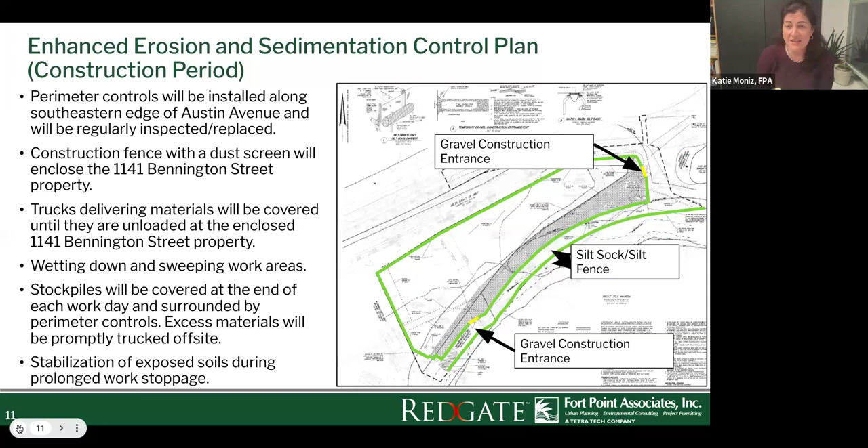Right, so is that on property owned by 1141, or is it property shared by DCR, being the abutter on one side and 1141 on the other? Could I ask staff to go back to a site plan so I can narrate the ownership? It is a little complicated in this space. Perhaps if you could take us back to the waterfront area plan, might be easier to see in color. Thank you so much.

As you can see here, it doesn't show all the way up to Bennington Street, but the portion of Austin Avenue that comes from Bennington Street to the hexagon on this plan is approximately the limit of the private way of Austin Avenue. Again, half of which is underlined by land owned by 1141 Bennington and half underlined by DCR. It has an easement that allows both parties, as well as MBTA fundamentally, to have access.

As we come further down here into the area showing the driveway to MBTA, the majority of that portion of Austin Avenue is purely MBTA's property.

Yes, so my concern is I understand all that. And then we have this gravel filter strip, which will take the first flush. It may require, as you mentioned, quarterly review. Is that filter strip on the inside of where this proposed fence is going?

Yes, it would be on the inside of where the proposed fence would go. As you look at the S-curve shape we have here, it is a linear band following along the edge of the roadway.

Okay, and then I guess my question is, for the part owned by the MBTA, or the MBTA's driveway, will they make the commitment to keep this gravel filter strip clean, excavating and cleaning it out biannually or whenever needed? Or is that going to be undertaken by the applicant at 1141?

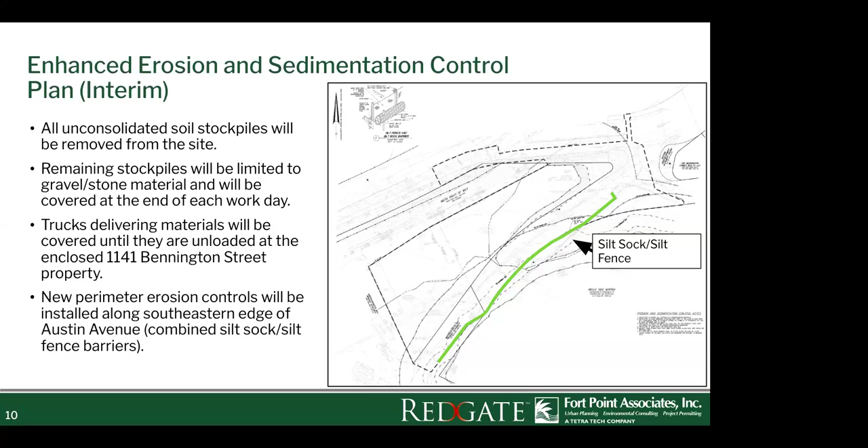And where are the utilities for this building located? Sure, perhaps the staff could go back. Maybe one slide would help here to see if we can see the space between the two buildings. Even one more, if you wouldn't mind.

So you can see here, the hexagon is the driveway into the project site. It is basically the space between the two wings of this building. And just off the page, unfortunately, is the location of the transformers, which are also elevated per the city's policy for climate resiliency.

And how high are they elevated? So the flood elevation here is at most 12. The elevation of the transformers and the lowest level of the building would be at 16, so 4 feet above that.

And in thinking about the future, is there any chart or expectation that you've seen that's going to suggest that the 16 is not going to be above water?

I'll take that as sort of a broader policy question. I think we felt like we worked well with the city staff here. Again, the projections that they are using are 2070 1% projections, so we are comfortable that provides the level of assurance that will make this as resilient or more resilient than Boston's upcoming development and current development today.

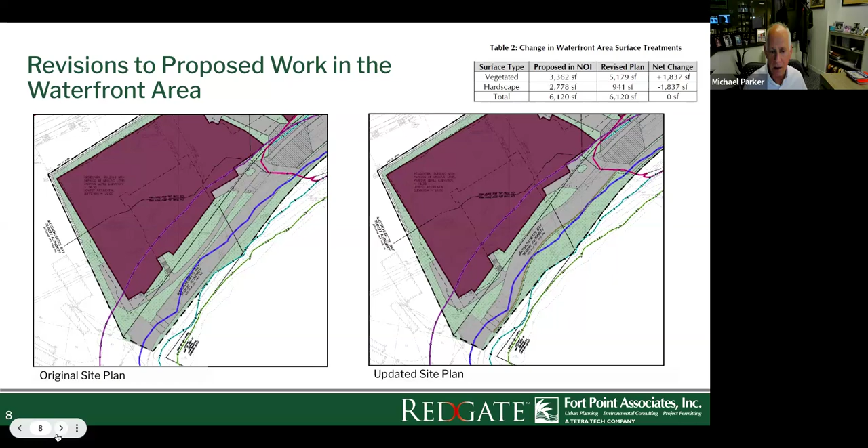Elena, who's up first? I know we have several raised hands. Yes, so I see Cindy Baxter.

Thank you, I really appreciate it. Thank you to the commission. And I'd like to highlight, as you all know, that we did submit written testimony, so we again appreciate the opportunity to do that. We'd like to point out the obvious: this is an environmentally risky spot. It just has a number of items, and it seems like trying to fit an awful lot into a very sensitive area. Not only that, it's a long-term issue in terms of everything going on near this property.

It's not just an area of environmental concern, but we've got the city of Boston trying to manage sustainability because Bennington Street is an evacuation route. We've got the MBTA dealing with expansion plans, not just because of sustainability alone, but because of the commitment they've made to the Red-Blue Connector. And there's, at least in their current design plans, no accommodation at the other end of the blue line. The Orient Heights Rail Yard is basically it. And we've got the DCR, who is actively working on doing marsh restoration within the guidelines and regulations for the Commonwealth. All of this is going on with a number of players who are not present at this hearing today.

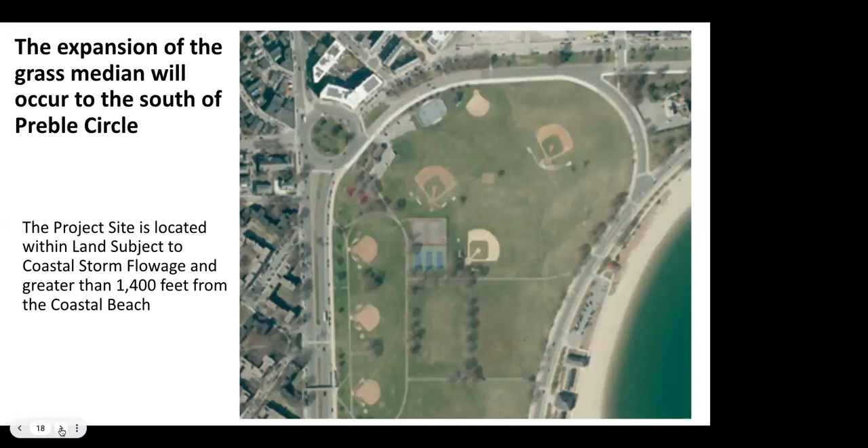So the next slide is basically just an aerial photo of the Preble Circle area, a little closer up so you can get an idea of what it looks like. Preble Circle is in the outer extents of land subject to coastal storm flowage. The floodplain elevation is 10 at that point, and the elevation of Preble Circle varies between 10 and 11. I'll wait for the next slide. All right, so there we are. If we could go to the next one, you can see Preble Circle is about 1,400 feet from the edge of the beach.

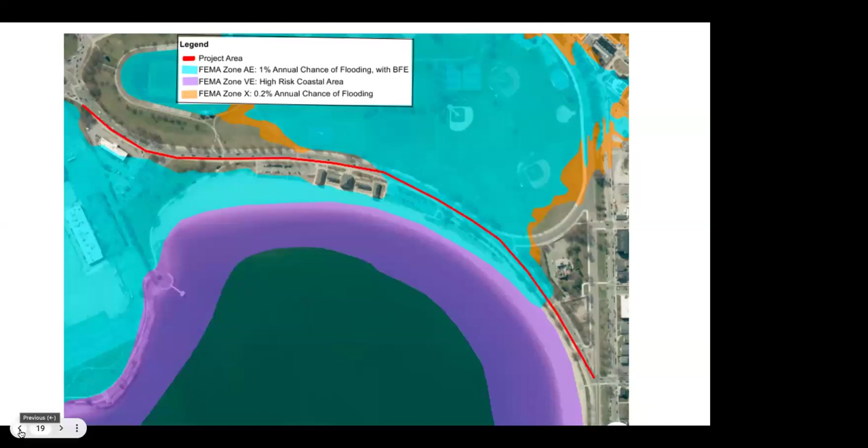Here's the floodplain with the VE zone. None of the work is occurring within the VE zone. That portion of the sidewalk work occurring within the AE zone will be within floodplain elevation 11. We're not proposing any changes to the elevations there. And as I said, at Preble Circle the floodplain changes to elevation 10, which is right about the elevation of Preble Circle itself. So even in the 100-year flood condition, the water would be inches deep in Preble Circle. Next slide, please.

And here we are, and you can see the elevation changes for Preble Circle. It changes real quick from the 100-year floodplain to the 500-year floodplain, which is the orange coloring here. The red line indicates the majority of the work that will be occurring at Preble Circle, and that is now a striped pavement area that will be removed and will become an expansion of the grassy median. So we're going to reduce impervious surfaces within the project area by about 9,400 square feet.

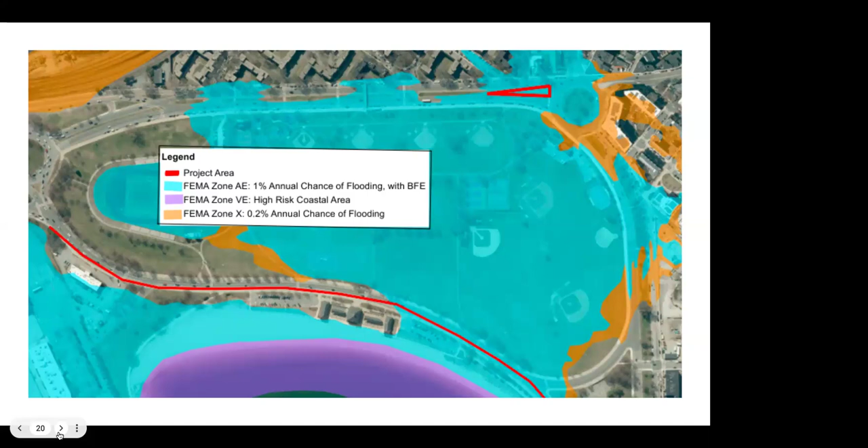So all crosswalks within the sidewalk in the project area will have all the crosswalks be ADA compliant at that point, with no changes in elevation. The temporary, or seasonal, water line that will be installed to service the water fountains will come out of the McCormick bathhouse area there. So we're not going to have to tie into anything in the street. It will just come out of the bathhouse and run under the sidewalk, so we're not going to be in the grass, upsetting root systems or anything like that as we put that in.

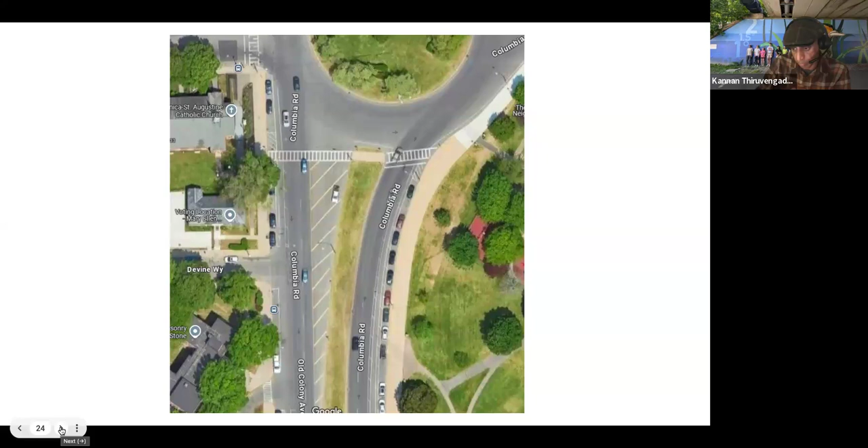Commissioner Kannan asked a final question: seasonal water line means the water line is permanent, but water flows through it only seasonally. Confirmed correct. That concluded the questions.

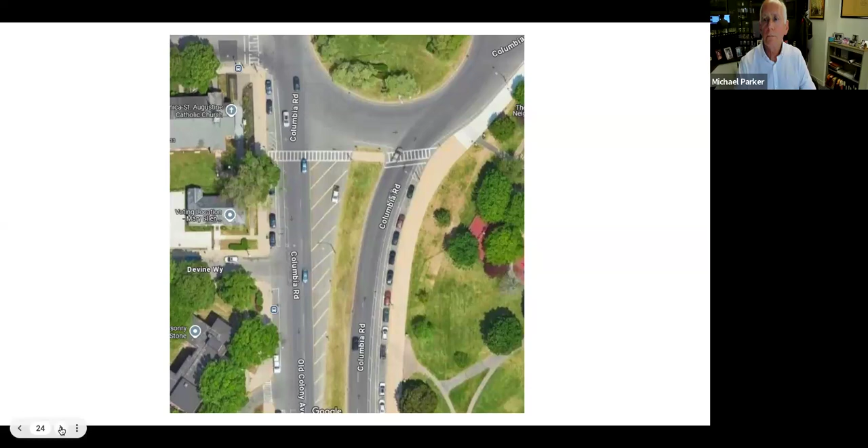Commissioner Richmond had no questions. Commissioner Herbst had no questions. The Chair then asked Elena if anyone from the public wished to speak.

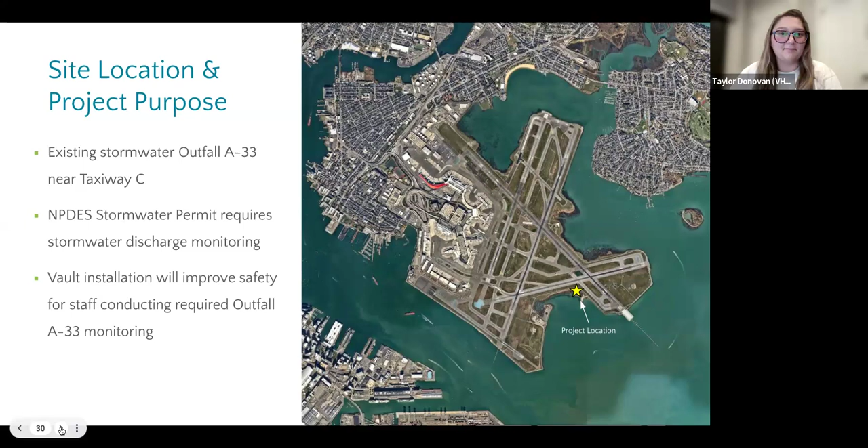Taylor confirmed this is a request for determination of applicability for the project as described. The project is located at Logan Airport near Taxiway C, near existing stormwater outfall A33, shown on the aerial image with a yellow star. The purpose is to improve safety for those conducting stormwater discharge monitoring at that outfall, and the project proposes installing a new stormwater access vault.

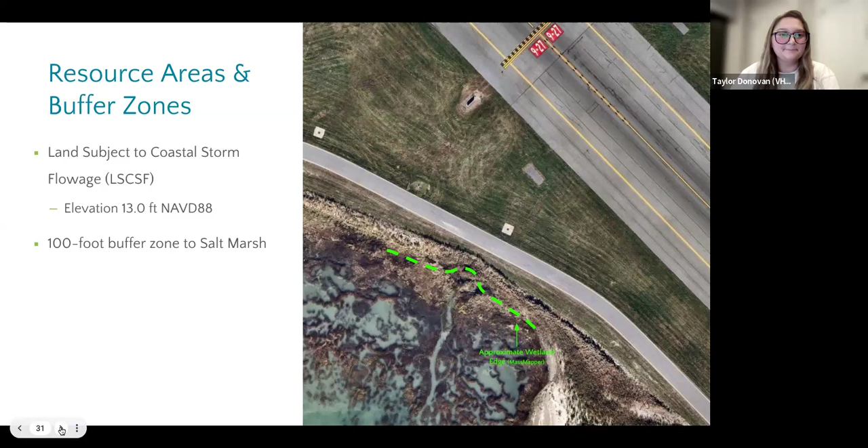So as I mentioned, the LSCSF on the site is at elevation 13. The edge of marsh is approximately at or below elevation 6 feet, and the top of the grass extent is around elevation 10 feet using those contour lines on the plans. In the red square, you can see the approximate limit of work area, a 100 square foot area of existing pavement.

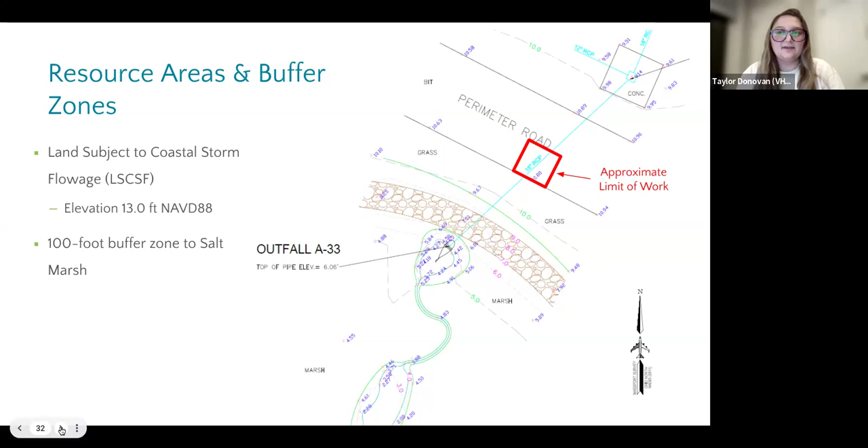So again, the proposed work is to install one new stormwater access vault within the paved surface of the roadway. All work will fall within the red square shown on the plan. Prior to any earth disturbance, fiber rolls will be installed at the down gradient limit. The contractor will saw cut the pavement, excavate material, and install a doghouse manhole structure over the existing pipe, then backfill the trench and restore pavement. There will be no change in elevation, grading, or stormwater drainage as a result of the project - just 100 square feet of temporary impact.

So if you have any questions, we are happy to answer.

Great. Thank you, Taylor. I don't have any questions.

Great, thank you. One quick question - where is the 100 square foot of temporary impact? Can you point on the proposed work aerial map? It's shown in the red square, along the perimeter road. So is that a 10 by 10 kind of square? Yes, and it's all within the existing pavement footprint. Great, thank you.

Okay, thank you. Commissioner Richmond? I just want to understand the same thing - is that the only place where the water would be impacted? So this red square is not touching the water.

The water flows through that pipe, and then just below the green, you can see kind of a football shape - that's the outfall, the symbol we're using for the outfall. So the water flows through that pipe underground and out to the outfall. This structure will be installed over the top of the pipe and will extend up to the surface so that they can sample from the flat ground next to the structure instead of climbing down the rocks at the outfall edge.

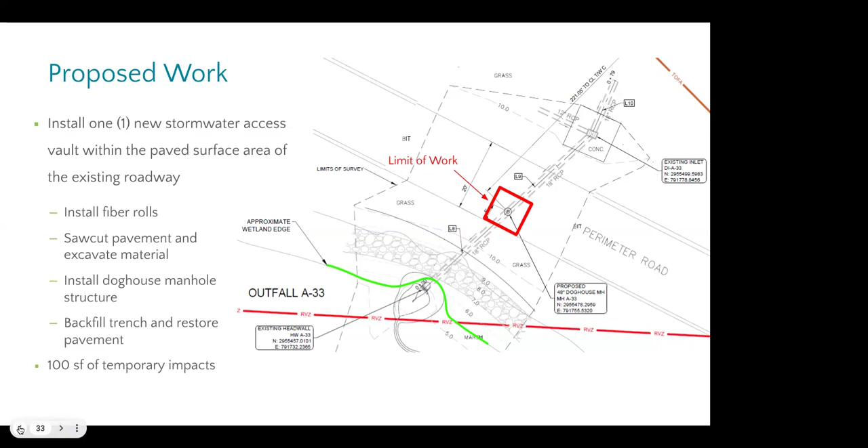So now I think I'm confused - is there work that's being done within the storm flowage area?

So the whole site is mapped as land subject to coastal storm flowage. It's at elevation 13, and I believe the top of the roadway is around elevation 10. So technically, yes, but it will be pretty much restored in place after the completion of work. Instead of asphalt, that area where the manhole is going in will now have the manhole cover. So the reason for the request is to avoid filing an NOI?

So the purpose of the project is so that anyone doing the stormwater discharge monitoring doesn't have to navigate down to the outfall structure, shown around the edge of that wetland, the green line. By installing the structure, monitors will just need to open up the manhole cover from the roadway and sample down from the road. It does look like a cup on a stick, so it's just safer for them. That's the purpose of the application.

Okay, thank you very much. Thank you. Commissioner Herbst? No questions. Thank you. Okay, any public comments, Eleanor? I do not see any hands raised. I don't see anything in the inbox either.

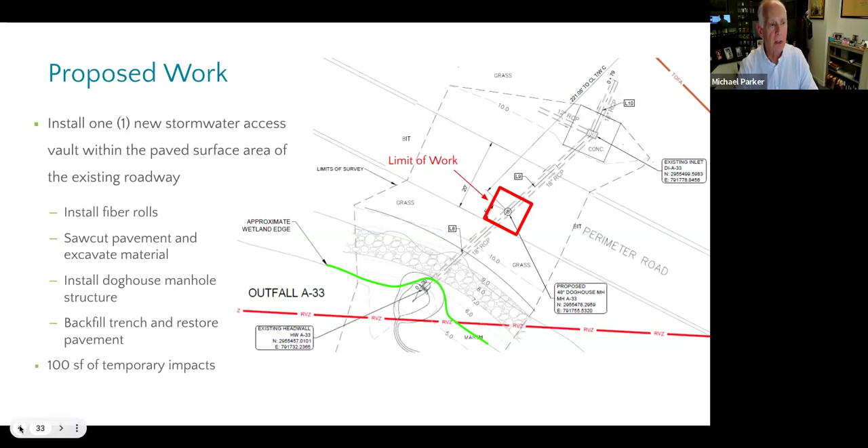Thank you. So I would entertain a motion to issue a negative determination of applicability with the standard erosion control conditions. So moved. We have a second. Second. Thank you. Commissioner Sullivan? Aye. Commissioner Linne? Aye. Commissioner Wilson? Aye. Commissioner Kannan? Aye. Commissioner Richmond? Aye. Commissioner Herbst? Aye. And I vote aye. That carries 7-0. Okay, thank you.

Thanks very much. Thank you.

Thank you. Okay, next item on the agenda is a request for a determination of applicability from Tighe & Bond on behalf of the Boston Gas Company, DBA National Grid, for the proposed replacement of 800 linear feet of existing gas mains with a single main between Columbia Road and William J. Day Boulevard at 1793 to 1849 on William J. Day Boulevard in South Boston. Who's here on behalf of the proponent?

Good evening. My name is Isabel Arthun Long. I'm a project environmental scientist with Tighe & Bond, and it's just me tonight. Okay. Floor is all yours. Excellent. Thank you for that introduction.

This is a request for determination of applicability that is an extension from a different RDA the commission approved in 2023, about a year ago. It's for gas main replacement work along William J. Day Boulevard. If we can go to the next slide, this shows the full extent of the previously approved RDA, showing gas main replacement all through this area.

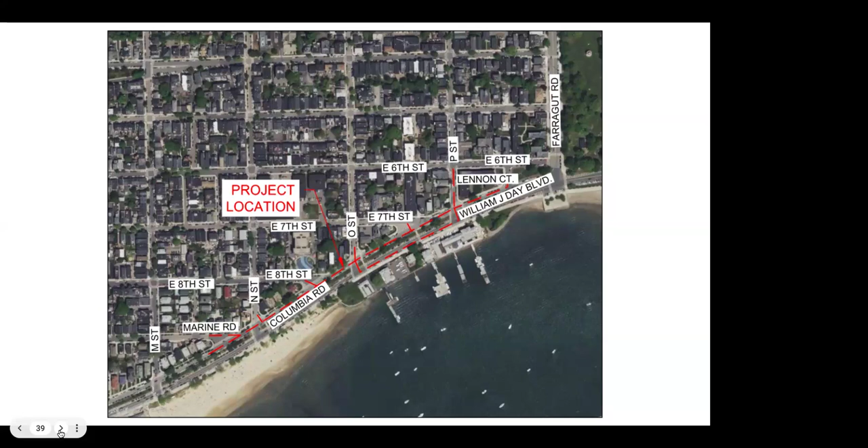The story is that when they went to open up the road at Columbia Road, they found several unmapped customer service gas lines running perpendicular through the median to William J. Day Boulevard. These were leak-prone pipes that needed to be replaced per mandate of the state of Massachusetts by the end of the year. But unfortunately they run underneath a DCR-owned median, and after several attempts at coordination with DCR, it was found that it would require permitting under Article 97, which would take years to complete, in order to access those customer service lines.

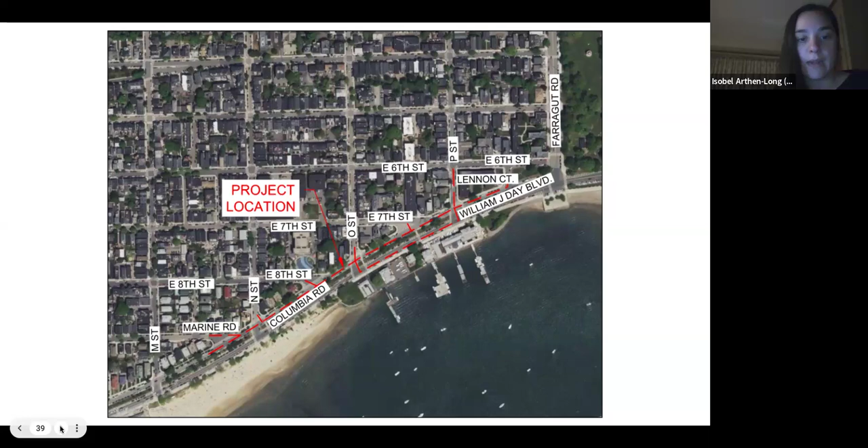So Boston Gas Company has instead proposed to abandon those pipes in place since they can't access them, and instead replace them with a single gas main that runs along William J. Day Boulevard between O Street and P Street. If you go to the next slide, you can see the limit of work for this proposed project, connecting from Columbia Road from the gas main currently being installed in that roadway, down to William J. Day Boulevard and back up to connect to Columbia Road, just to bypass those old customer service lines.

The full extent of the work, as you can see, is located within land subject to coastal storm flowage at an elevation of 11 feet.

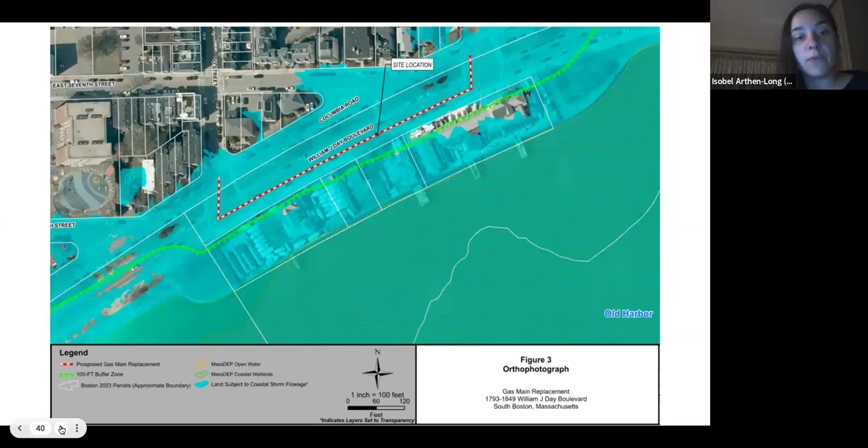If you go to the next slide, I just have a couple images for you here. You can see there's a gas main going through the median here, perpendicular to these two streets. There are several of them on this block between O Street and P Street. You can go to the next.

I unfortunately can't show you with my cursor, but you all, I believe, have the plans in front of you as well, and can hopefully see closer these lines going across. So instead, we're just proposing to put a single gas main along William J. Day Boulevard. All of the work will be confined to the paved roadway right of way.

These are a couple of images of the area at the intersections of O Street and P Street, showing those two roads, Columbia Road and William J. Day Boulevard. That's what I have for you. It's a very straightforward project, and I'm happy to answer any questions from the commission.

I'm looking at an email here regarding erosion controls. Elena, are we okay with erosion controls? And Isabel, thank you for the explanation there. Yes, I believe we are all set with erosion controls, but we generally still include that in the standard erosion and sediment controls if the commission chooses to issue a negative determination.

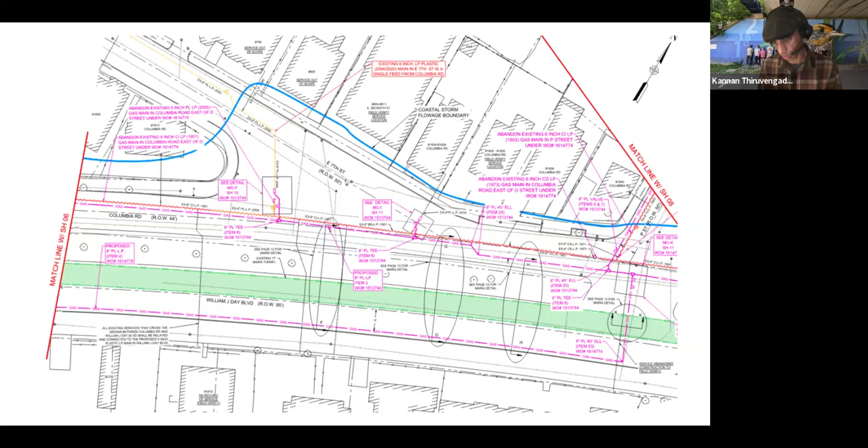Okay, Commissioner Richmond. Yeah, I have a question about whether, given what Commissioner Sullivan said, we're ready to vote on this. In other words, is it important to know whether there's a sewer pipe running exactly in the same place as where they want to build this?

Yeah, I think what Commissioner Sullivan was issuing was a caution that the proponent needs to make sure they check locations of utilities. Commissioner Sullivan? Yeah, that's all it is, I'm just giving a heads up. You've got to get the permit and find out. You may even be able to see it, I don't even know if they've permanently paved it yet, so they may see it in the street. Gas companies are notorious for avoiding anything like that, except if they want to lay on top of water mains, which you've heard me complain about all the time.

So I guess where I'm stuck at the moment has to do with the comment made immediately before, that this is a pretty big project. I think we would have more control over it and how it was done if it went on an NOI. So I guess this is a question for the applicant: are you doing it this way because of the speed with which National Grid needs to get this done? Sure, I can answer that.

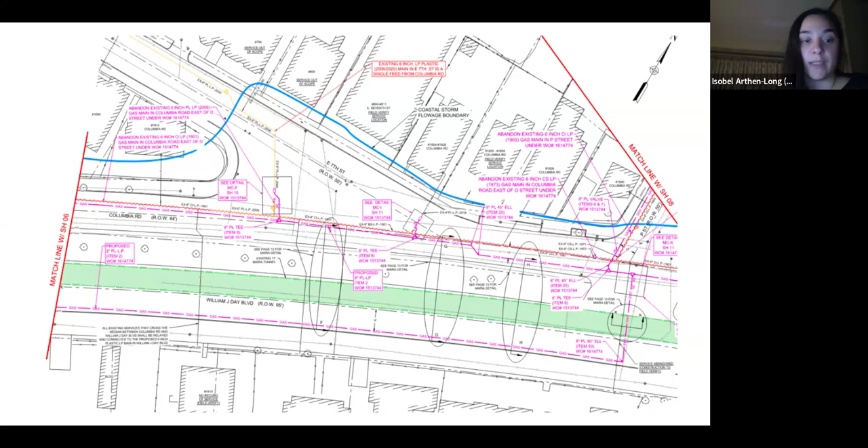Well, you're doing a great job for your client, I have to tell you, but the fact that they don't even know that they had the lines there is not comforting to me at all. But thank you for your response.

Okay, Commissioner Herbst. Yeah, I just want to comment. I think we approve these really regularly as an RDA, so I don't have any concerns with this. And actually, to the extent they're replacing potentially leaky pipes, I'm quite glad for them to get it done.

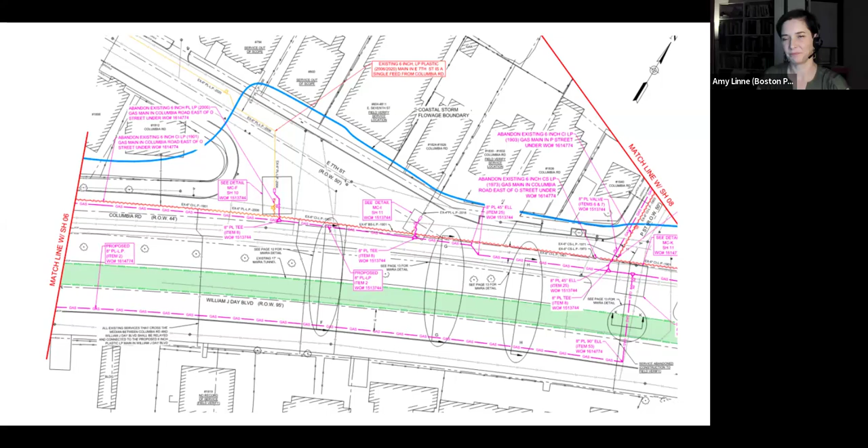Second. Thank you. Commissioner Sullivan? Aye. Commissioner Linne? Aye. Commissioner Wilson? Aye. Commissioner Kannan? Aye. Commissioner Richmond? Aye. Commissioner Herbst? Aye. And I vote aye, so that carries 7-0.

Okay, thank you. Excellent. Thank you very much. You're welcome.

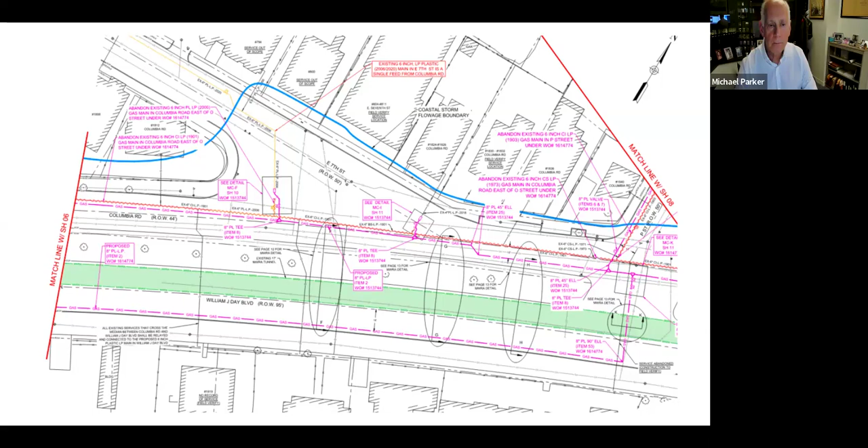Okay, next item on the agenda, request for an extension to the original order of conditions issued for DEP file number 0061832, Boston file number 2021-056 from Nitsch Engineering on behalf of Seaport D Title Holder LLC for the proposed demolition of a parking lot and construction of a new building and underground parking garage located at 65 Northern Avenue/88 Seaport Boulevard in South Boston. Resource area is land subject to coastal storm flowage.

Elena, are we getting a presentation on this or a narrative? I think we should be getting a presentation. Okay. Good evening, John. There it is. Hi, good evening, John Schmidt with Nitsch Engineering. And with me is Amy Prange from WS Development.

We were before you about approximately 3 years ago, where we received an order of conditions for this proposed building and related improvements at 88 Seaport. Since then, we've been unable to get to the point where we can break ground. This is due to a series of market conditions, code changes that require significant internal building redesign, especially related to the stretch codes and the energy code. We're also working with the MBTA on getting an access permit for them. As you know, they're working on the head house that abuts our parcel, so we're sort of on pause until that project is completed and we can go forward. So there's been a series of conditions that have prevented us from moving into construction for this project.

But during this time, once we got through the commission several years ago, we went to the Public Improvement Commission, and through their permitting process, they asked us to change what we had proposed as a private way into a plaza courtyard area. So in meeting with Elena a couple of weeks ago, she suggested that we come and describe those changes to the commission as part of this extension request.

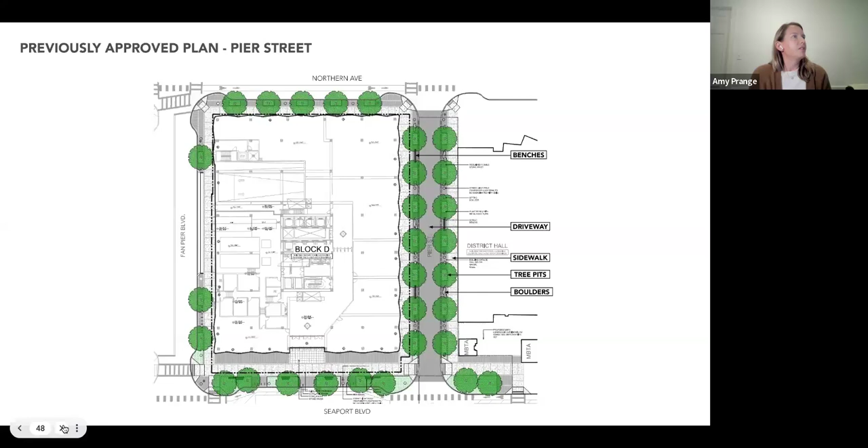The next slide shows what we came up with after meeting with Boston Transportation and the BPDA several times. They suggested that we should be building a place for people and not a place for cars. So we came up with this plaza design. It's an improvement in our eyes, and I hope you guys agree.

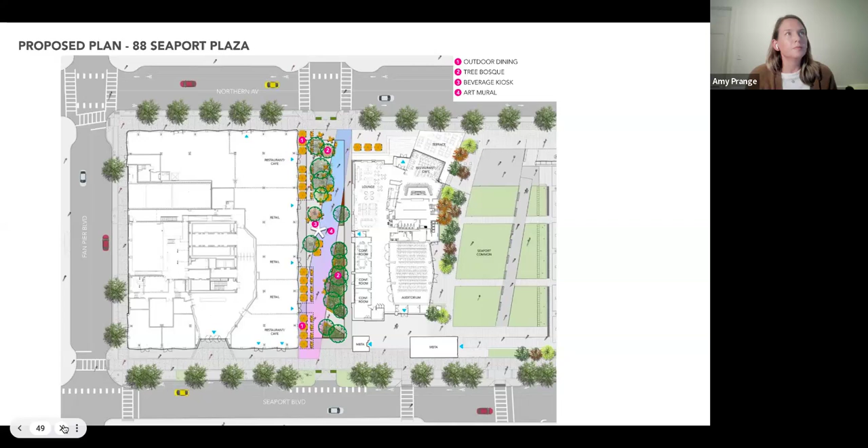I'll walk you through the planting changes in the next slide. The previously approved design had 14 trees, and the new plaza has 16 trees. There's a little bit more green space as well—we'll go from 789 square feet to 1211 square feet. We've diversified the tree species. The previous design only had swamp white oak, and we have 6 different trees in the new design.

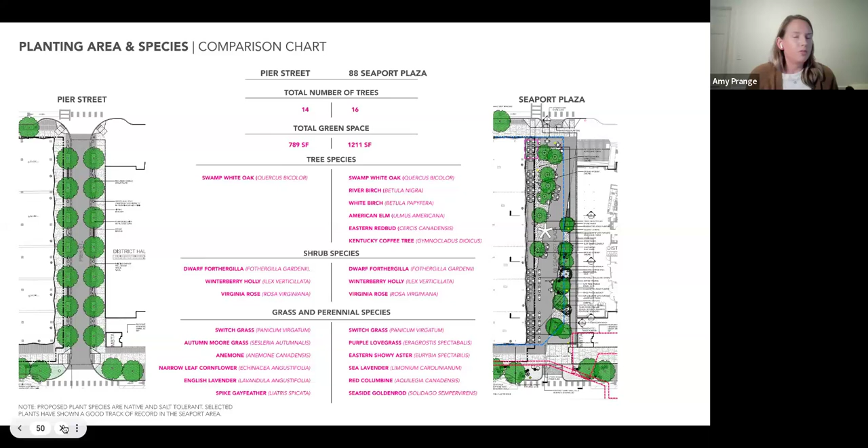The shrubs stayed the same, but we've also changed the grasses based on what we know thrives well in the Seaport, because they're all native species that are salt tolerant. If you go through the next few slides, you can flash through them—there's just images of the different plant species for reference.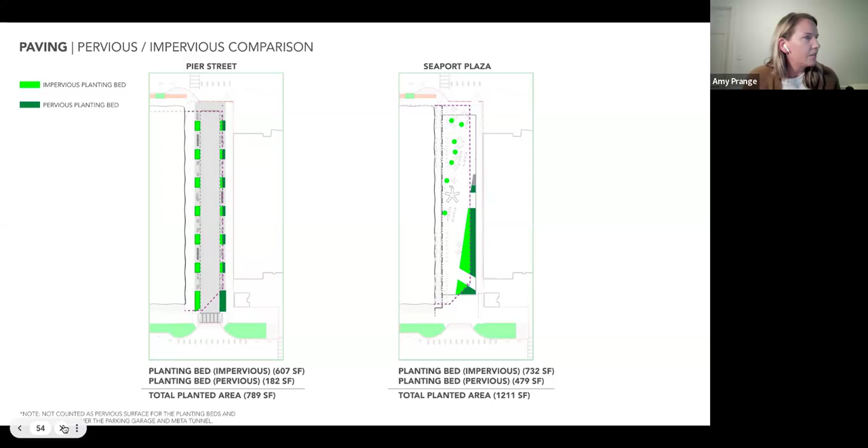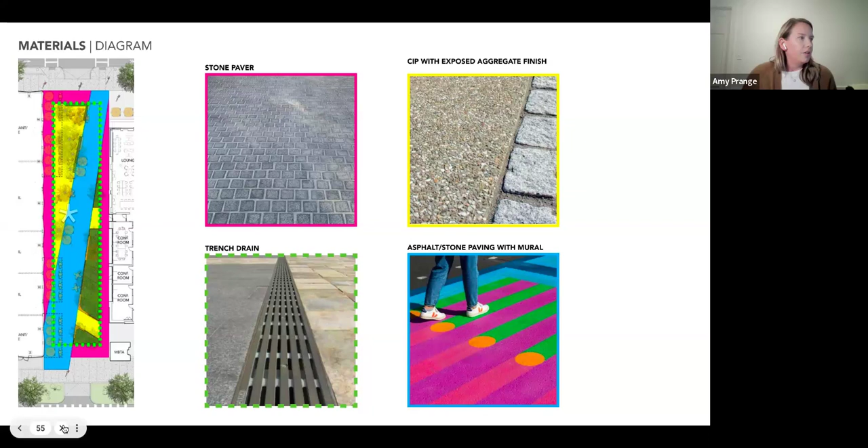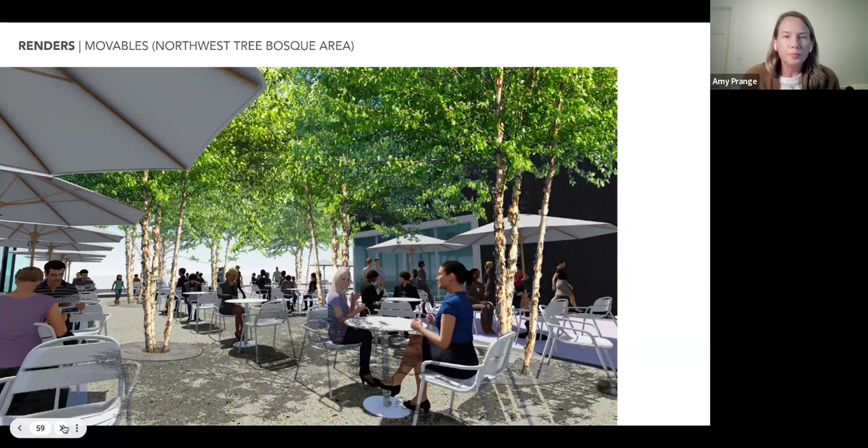If we flip through the next few slides, we have some renderings. This one is from Northern Ave looking south towards Seaport Boulevard. This is in the plaza looking north towards Fan Pier Green. This is a seating area in the middle of the plaza, and another seating area.

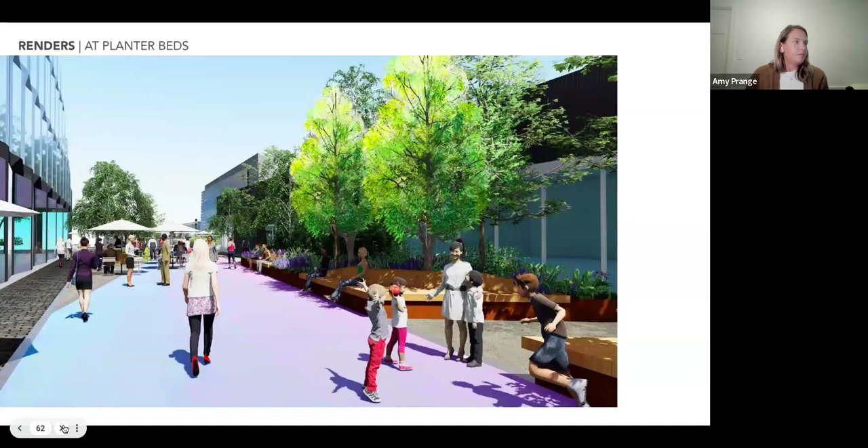And then we have some views of what the mural could look like. We don't have an artist selected yet since it's not built, but it's something we're looking forward to. It's a bit unusual to have fully designed the building and then change the plaza, but at WS Development we're very excited about this new design—we think it'll fit better with the neighborhood, and we're always excited to build places for people.

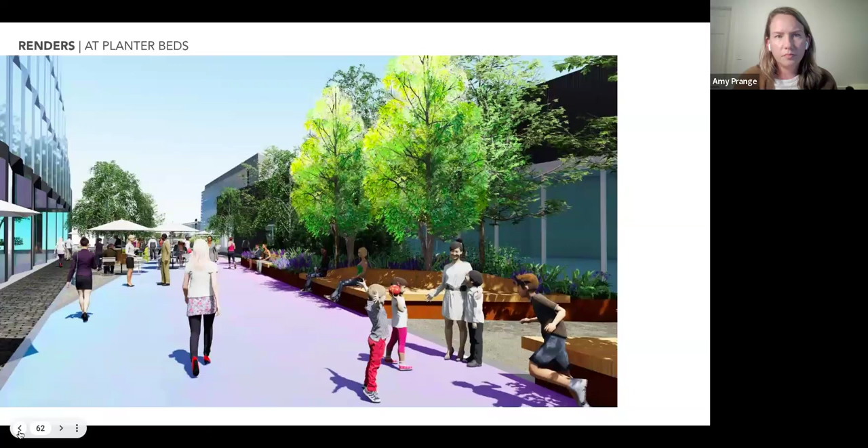I guess these views are good. The perennials and the shrubs are in those raised planting beds. It's surrounded by corten, and there'll be wooden benches.

So the southern planted area is this raised bed to try to get some more soil for the trees, and to raise the trees up so we have some more privacy. The district hall's meeting spaces are right beyond this view, you can look into them right here. We wanted to provide some more privacy for the meeting spaces from the public plaza.

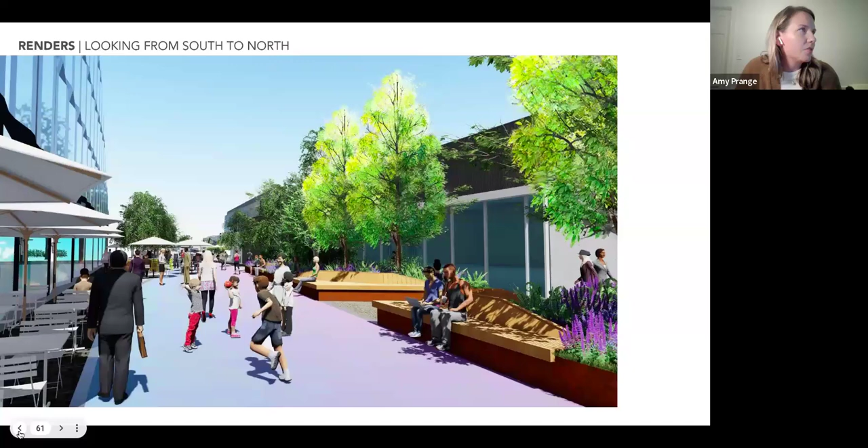And then the trees in the distance at the northern end of the plaza are in more of a structural soil over the garage, and that's where the cast in place concrete is. We have those pretty large stainless steel grates surrounding the trees so we can get access to the roots.

I'm happy to share the planting plans and the soil plans with you if you have further questions. I'm just curious, but that's great. Okay, thanks. Great, thank you.

Commissioner Wilson? Yeah, no, this is an exciting change. I like your use of forced perspective there too, which hopefully makes it feel like a bigger space.

I was just curious, is this still available for vehicular access, sort of woonerf style or whatnot, or is that no longer envisioned? So we still have driveway entrances on both sides at Northern Ave and Seaport Boulevard, mostly to bring trucks in for events and also maintenance for the building.

It still exists as Pier Street in our PDA, so in the future if the city feels like this wants to be a street instead of a plaza, it's easily changed. That was another reason why we chose asphalt down the middle, just in case we needed to bring a car through here.

This change came up between new business and public hearing for PIC. So we already had the driveway entrance in there, we just kind of kept it.

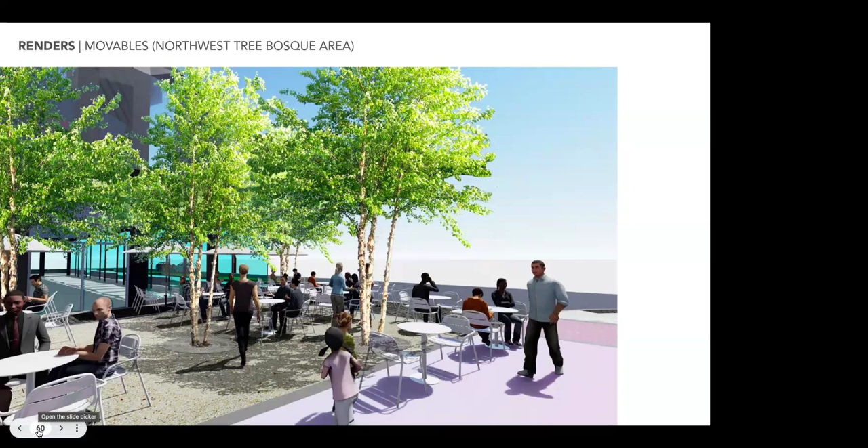The only other question I had was, I know WS Development's been doing a bunch of work down there. This redesign has sort of baked in some of those lessons learned in terms of wind burn on the trees, the amount of irrigation, that sort of stuff.

Yeah, for sure. That's one of the reasons why we chose those big giant tree grates you see there, because we want access to the root balls. And a lot of the perennials and grasses originally specified, we learned don't do great in the seaport, so we have a whole different mix now. We baked in a lot of lessons learned.

And then I don't know if I've seen the triple stemmed trees like that down there. I know I've seen them all over Kendall Square, but are there any examples in terms of how they've performed? I'm just curious.

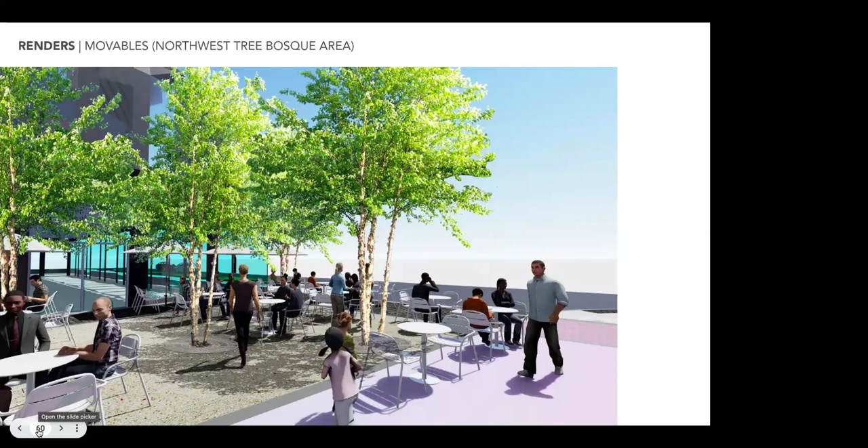Yeah, there's some birch trees that went in with District Hall in 2013, on the east side of District Hall, and they still look great. Fantastic. Okay. Thank you.

Great, thank you, Commissioner Conan. Thanks, Chair Parker. Why don't the perennials do well?

So the ones that failed, they really didn't respond well to the wind. I would say they were not sturdy enough for the winds that we see in the seaport. So the ones that we picked are more sturdy, and they also have more visual interest. They're not just green, they have different flowering things throughout the year.

That's great. So yeah, it seems very exciting as a place for people to hang out and walk. I didn't quite understand the multi-purpose of allowing vehicular access on this space. Is that a future possibility, or is it definitely part of the plan?

It would just be periodically if we were going to set up for a major event, like a truck with event material or whatever, it would just load and then unload. Or if we had to do some maintenance on the building, there's space to get up close to the building.

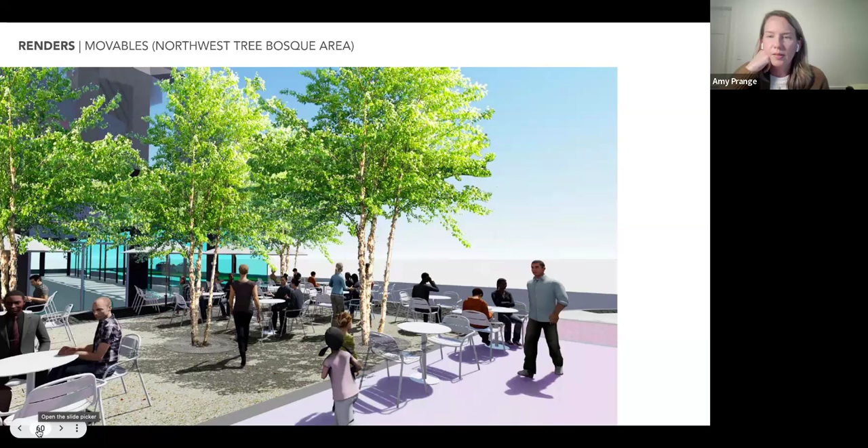Thanks, and you also have asphalt/stone paving here. Which one is it? If you go to slide 10, go back a few slides. Is it one of the renderings? Well, this area right here that you see, sorry, if you go back. Okay, cool, yeah.

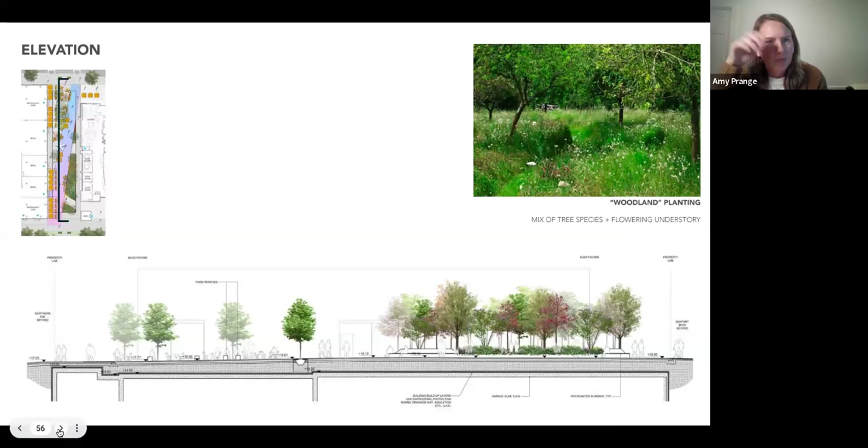So you can see where the trees are that we're looking at now. And that tree area in the foreground, that's a cast in place concrete area. The trees come up out of that area with tree grates. And then you can see the darker gray is a cobblestone paver. And then the area that's purple, not over the paver, that's the asphalt.

In the materials diagram, you have indicated that it could be asphalt or stone paving. Is that correct, or am I reading it wrong? Yeah, so you see how the mural kind of spans two materials. It goes over two materials, but primarily, if you're looking at the materials diagram, within the green rectangle, that's asphalt, and then it comes out over the stone pavers where it meets the public sidewalk.

Oh, I see, so you have both. Any reason why it couldn't just be stone? This is just me trying to understand the need for asphalt here. To be honest, we're painting it, and it's kind of a shame to paint an expensive material, so we thought asphalt made the most sense.

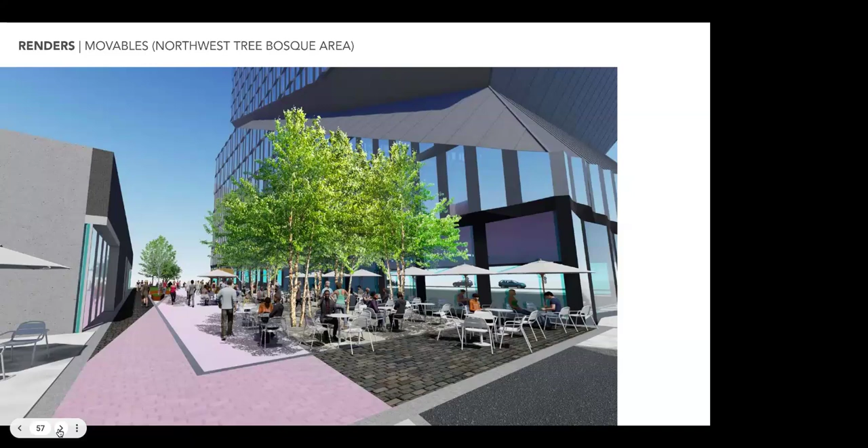Okay, great, thanks. Commissioner Richmond? I don't have any questions. I love honest answers. Thank you. Commissioner Herbst? Yeah, I'm sorry to say this now.

We've had a lot of conversation about it, but I'm fine with the extension. I feel like this really should be an amendment. I mean, you're changing from a road to a plaza. You can see how many questions we've had. I hate to be bureaucratic that way, but I think it goes quite a bit beyond just letting you know there's a few things different. I'm open to what the commission thinks. That's my perspective.

Thanks. Okay. Elena, anybody from the public? We do not see any hands raised, and also nothing in the inbox.

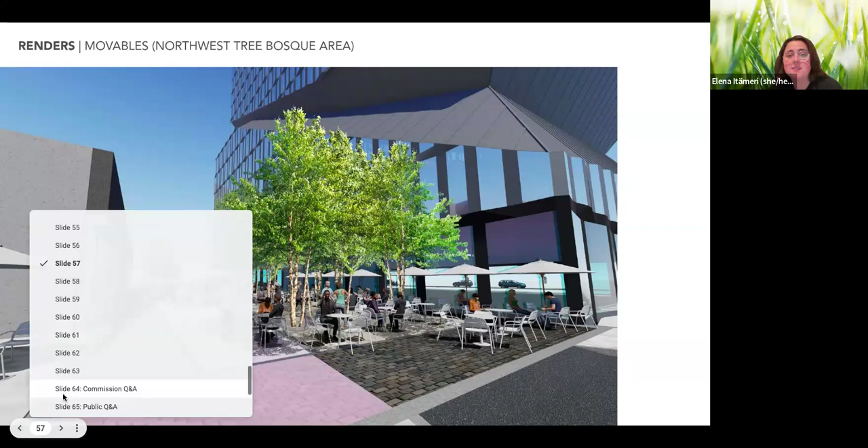And I will say that I think staff was on the fence about whether or not this needed to be an amendment. So Commissioner Herbst, if you think that would be more appropriate, and if any of the other commissioners think that would be more appropriate, we can certainly send the team resources on what that process would look like.

Okay, thank you. Commissioner Sullivan? Aye. Commissioner Linay? Aye. Commissioner Wilson? Aye. Commissioner Conan? You're on mute. Aye. Thank you. Commissioner Richmond? Aye, and I agree with Commissioner Herbst. Okay, thank you. Commissioner Herbst? Aye. And I vote aye. That carries 7-0.

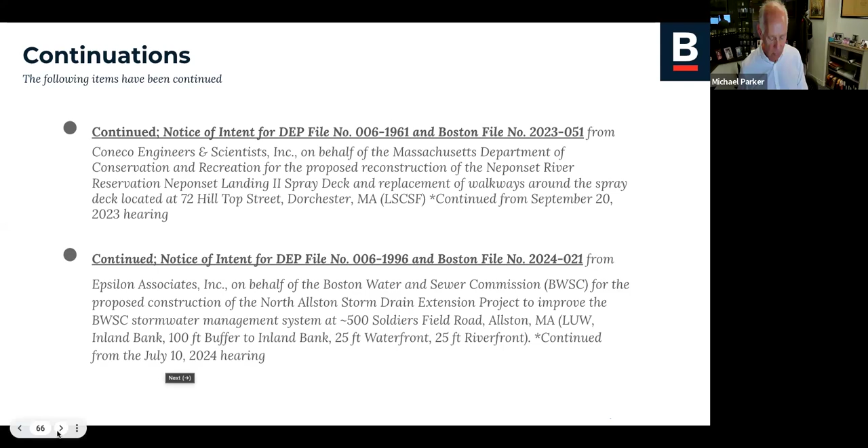Elena, what do you have on this? Yeah, so if the commission will recall, this was on the agenda at the last hearing, and we had a few outstanding items that we were still waiting for the team to resolve. Those items have been resolved. We've conducted a follow-up site visit, and we would recommend issuing a certificate of compliance with perpetual maintenance conditions for conditions number 26, 47, and 84 from the original order of conditions.

Okay, thank you. Any questions from any of the commissioners? Okay, so with that, I would entertain a motion to issue a certificate of compliance for DEP file number 0061814, Boston file number 2021-041, with the perpetual conditions that Elena has testified to.